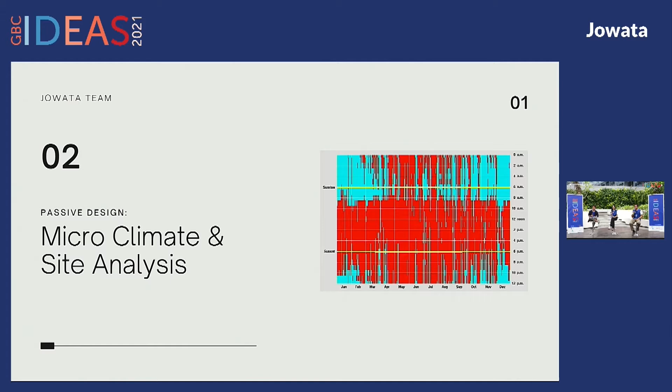Next slide, please. Next slide. Oh yeah. Next again. Next again. Sorry.

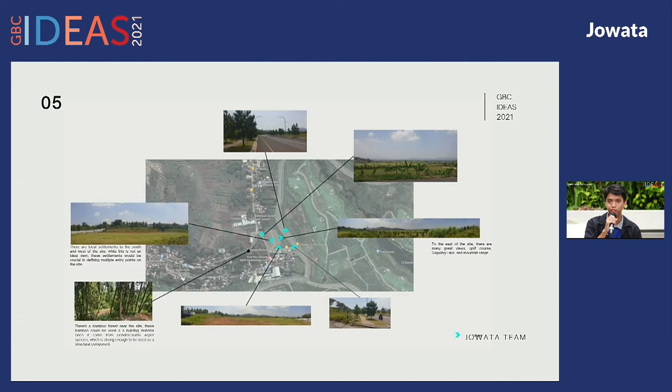Next, please. All right. Okay, so after analyzing the site, we chose to prioritize our anchor of the site towards the east and the west of the site itself. Because the east side has many great views like Lake Saguling, golf courses, and mountain ranges. And towards the west of the site, we chose to put some entrance points for the local settlements there. Next slide. Next.

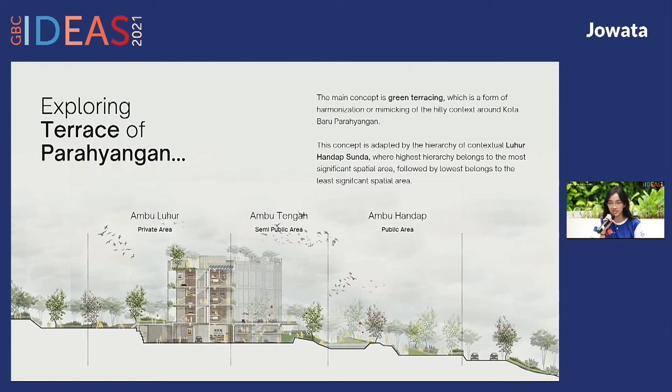Exploring the greenery of the integrated new city, Kota Baru Parahyangan, our site is surrounded by a potential range of mountains. Two words that immediately pop out of our mind are Hijau, which is green, and Perwata, which is mountain, in Sundanese. These words became the pioneer for us to create a concept of green terracing, a form of harmonization with the hilly context of Kota Baru Parahyangan. We also adapt luhur handap, which is a placement of usage area based on its hierarchy. Next.

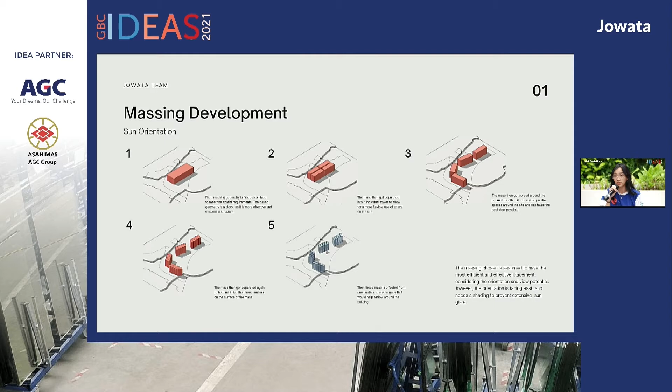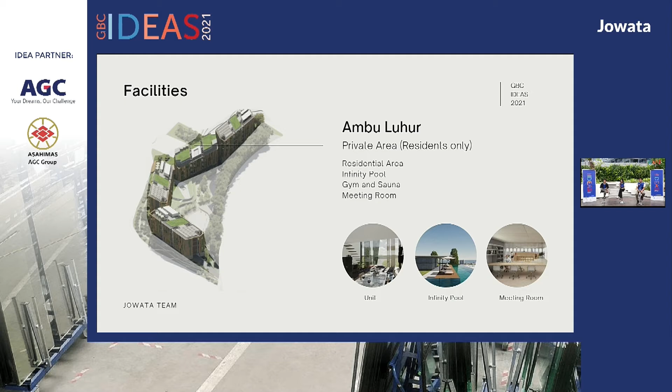Starting off with the block geometry adapted from spatial organization, we develop massing with wind flow and sun orientation consideration, reaching the most efficient final massing to tackle sun glare from the east direction, but capitalize on the potential view and allow wind flow penetration. Next. The first one is Ambu Luhur. It is dedicated for the private area. Next. The semi-public is called Ambu Tengah. Next. And the public one is Ambu Handap, dedicated for leisure and hub center. Next.

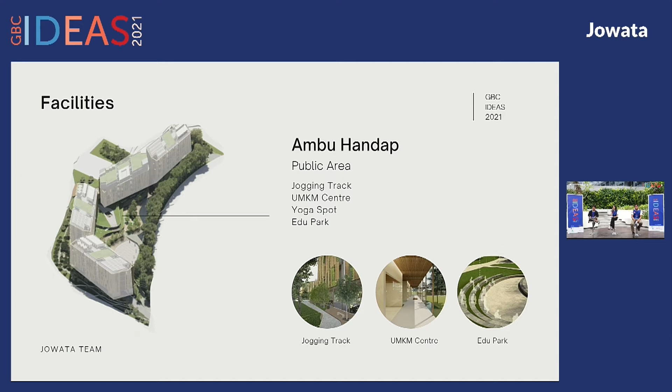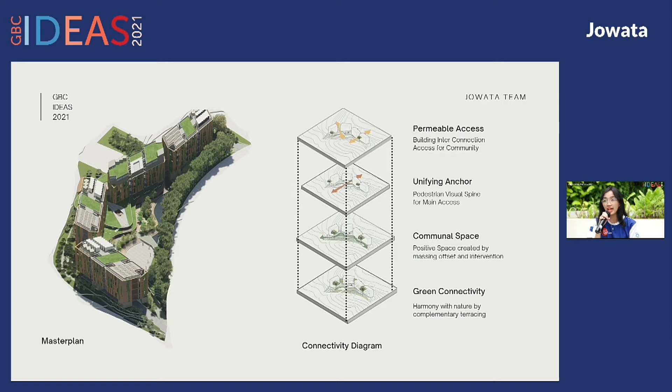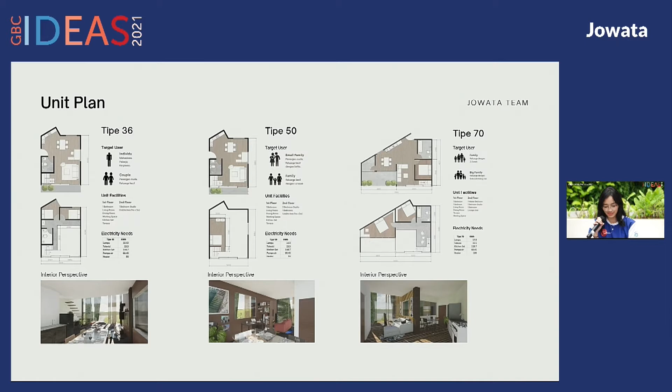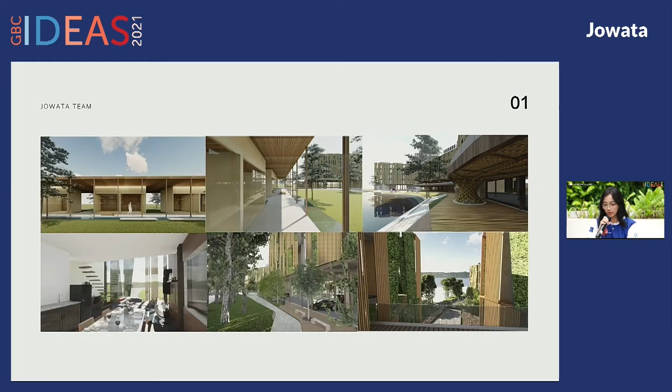We also have visualization of the master plan and connectivity diagram, in which we have permeable access, unifying anchor, communal space, and also green connectivity. Next. We also have 3 different unit types that aim for the diverse targeted users and various facilities. Next. The 3 main issues that we develop inside are social, ecology, and economy, in which we hope that Jowata can build a smart, sustainable green ecosystem that empowers the local community to drive the economy of Kota Baru Parahyangan. Next. Next. So here are some visualizations of Jowata. Next.

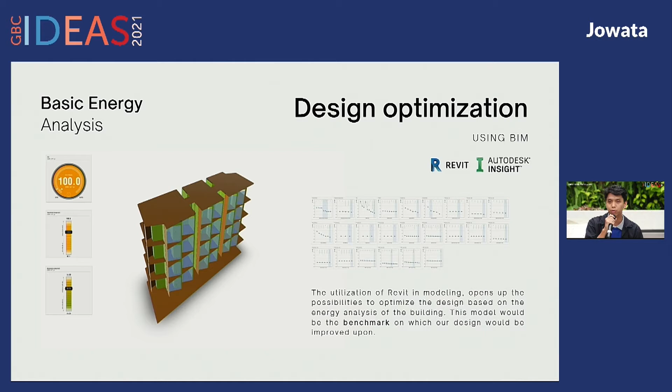So now we're moving on to the passive design strategy. Next. So before we dive deeper into the optimization, first we try to model our base building in Revit, and then also analyze it using Autodesk Insight, and then use it as a benchmark on which our design would be improved upon. Next. Okay, so here is the list of suggested strategies that could be applied on our design to help improve the EUI. Next.

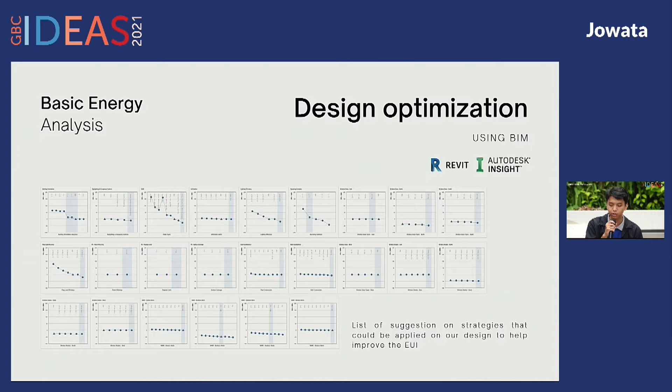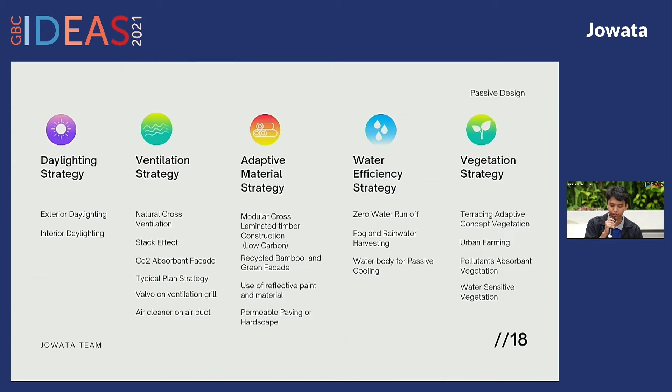And then these are the five strategies that we chose to use to tackle this issue. First is daylighting strategy, and next is ventilation strategy. The third one is adaptive material strategy, the fourth one is water efficiency strategy, and the fifth one is vegetation strategy. Next. Next. So for the daylighting strategy of the exterior of Jowata, we start off with the goal of obtaining the least solar heat radiation with a modification of orientation, geometry, plan layout, and also shading device facade. Next.

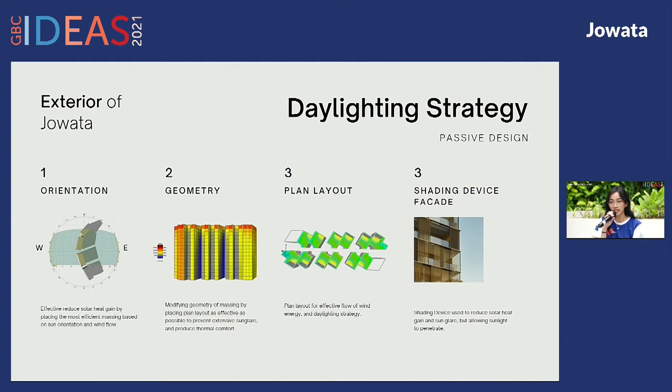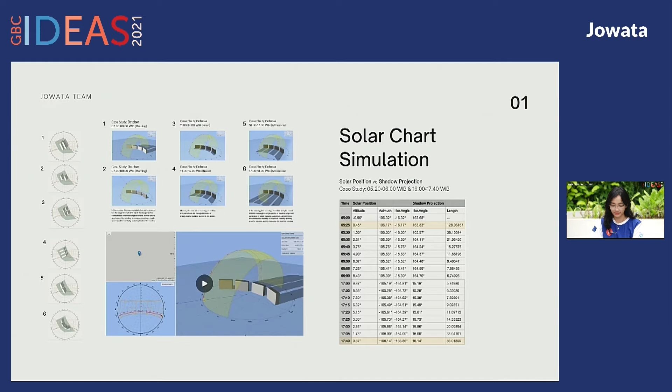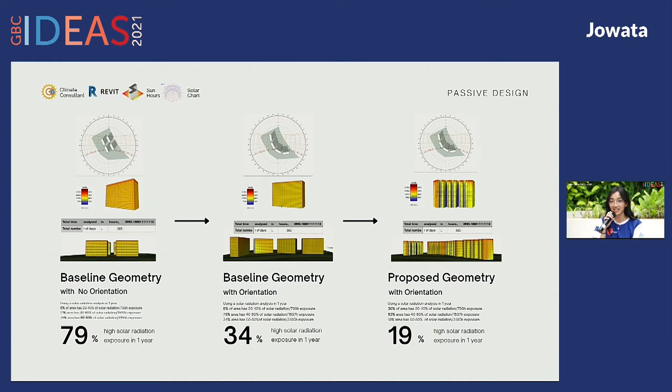So we try to run a solar chart simulation for the 6 massing studies that we currently analyze. Next. So the first one is baseline geometry with no orientation, and then baseline geometry, and then the last one is proposed geometry with orientation. From this simulation, we have succeeded to reduce 60% of solar radiation exposure to this building. Next.

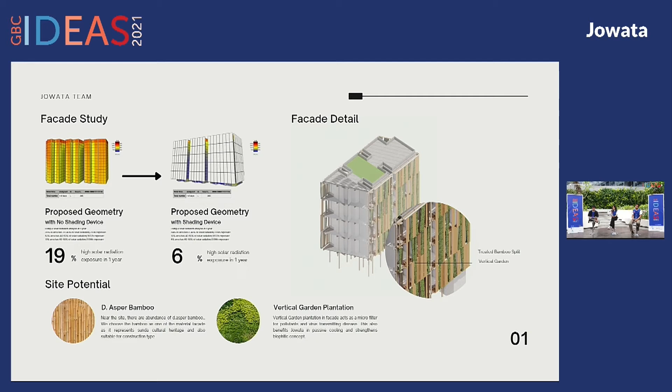For this shading device, we propose a combination of double skin Dendrocalamus asper bamboo and various vegetation facade which is abundant near Kota Baru Parahyangan. After simulation, we succeed to reduce the solar heat gain by 13% by this proposed double skin facade. Next. So here are some of the visualizations of the facade itself. Next.

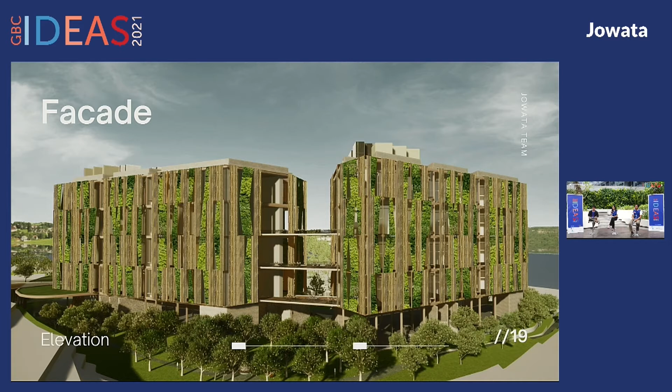Okay, so for the interior daylighting strategy, we use some different components on our design, which are skylight, AGC high performance window, double skin facade, light shelf, reflective paint and material, green roofs, light duct, and triple pane insulated glazing window. Next.

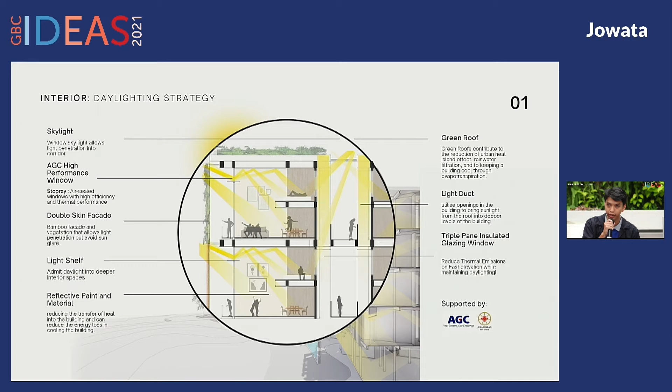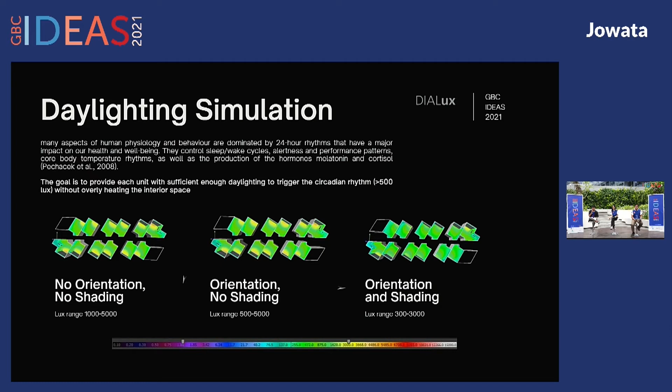And after that, we do a simulation using Dialux Evo. And the goal here is to provide each unit with sufficient daylighting to trigger the circadian rhythm, which is triggered at more than 500 lux without overly heating the interior space. And then these are the 3 variants that we use to simulate. And we chose the last variant, which is the optimized orientation and shading one. Next.

So here we could see that after choosing the third one, we still get more than 300 lux on the furthest side from the window area. And this is already enough for day-to-day activity. And then moving to the balcony, we could achieve more than 3,000 lux, which is enough to trigger the circadian rhythm. Next.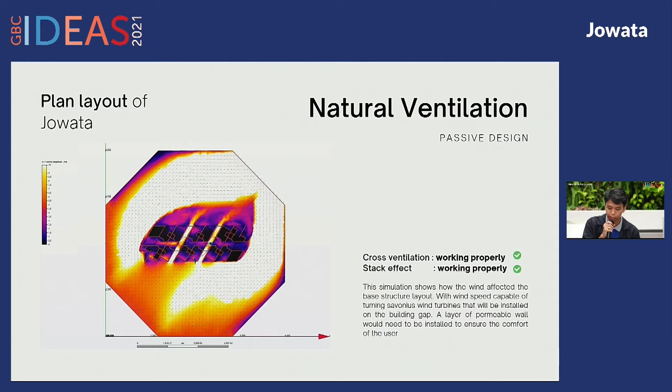Moving into the adaptive material. Next. So here we chose to use locally sourced materials and also high performance materials to help our design. As we can see here, there are insulated roof slab, teak wood CLT as the main structure, treated bamboo split as the facade, insulated GRC wall, woven bamboo as the insulation on the podium, Padalarang stonework cladding, and also treated full culm bamboo, which came from the species Dendrocalamus asper. Next.

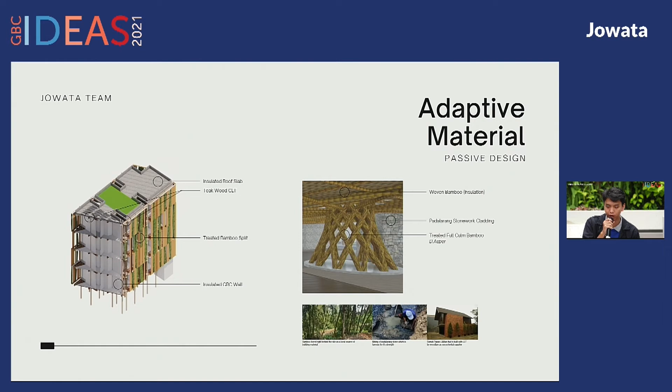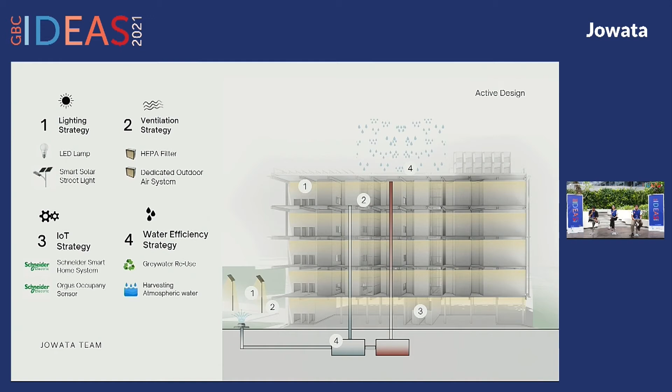And to the active design strategy. Next. We chose to implement 4 different strategies: lighting, ventilation, IoT, and water efficiency. Next. Okay, so moving on to the healthy aspect. Next.

For the protect health aspect, to reach the goal, we implement two strategies. The first one is passive, the second one is active. Passive happens through the optimization of natural ventilation, pollutants absorbent micropores facade, vegetation strategy, and water retention pool. For active, we implement HEPA filter inside the room, dedicated outdoor air system, indoor dehumidifier, and also gray water recycle.

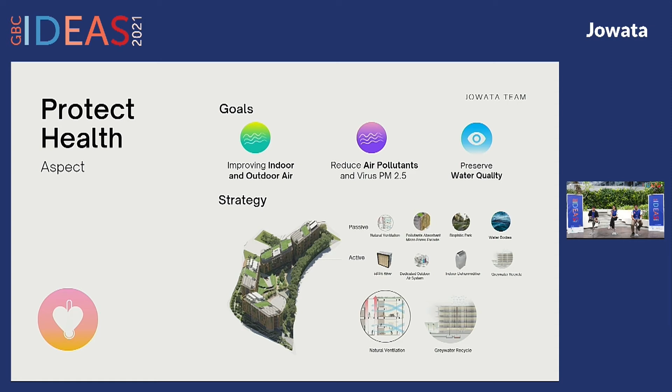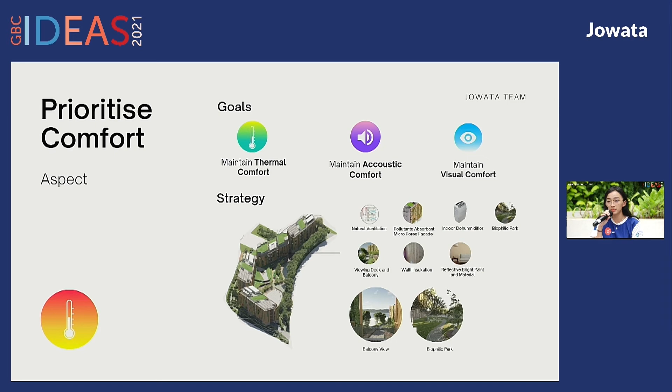Next. To reach the goal of prioritized comfort, we try to create a biophilic park. This will maximize the balcony view and also optimize natural ventilation, and create insulation on walls to avoid noises. Next.

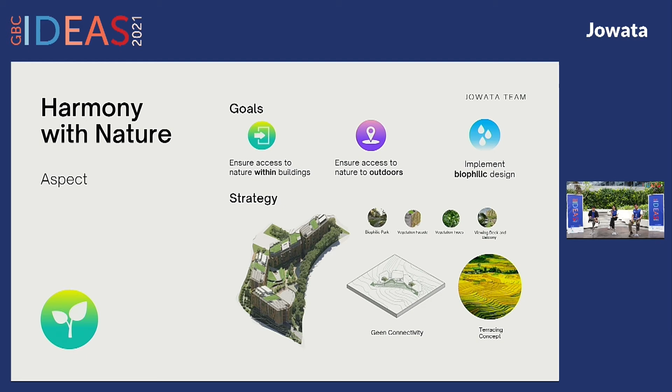To reach the goal of harmony with nature, we try to map the green connectivity on our site by creating vegetation clusters as recreation for outdoor and also a vegetation facade for the indoor area to ensure access to nature from inside. Next.

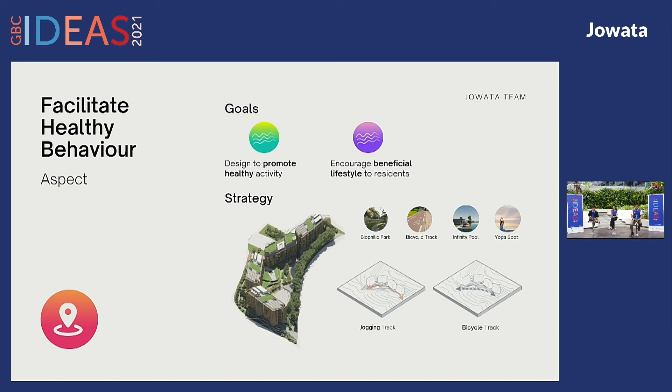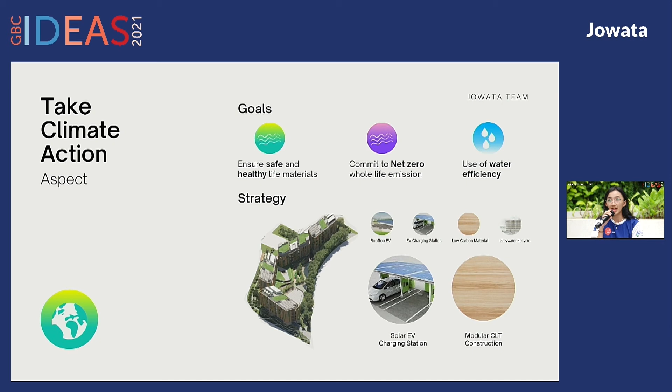Last but not least, we also support the take climate action aspect by providing the solar EV charging station and also use low carbon material in the construction of Jowata. Next. And then for the application of vegetation landscaping, next. So here we could see the different vegetation types which are zoned depending on their uses on our site. Next.

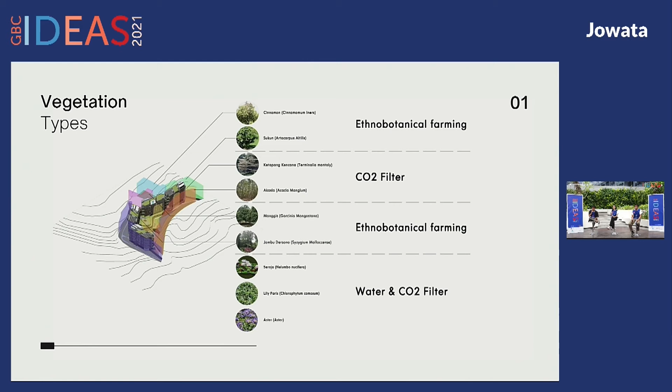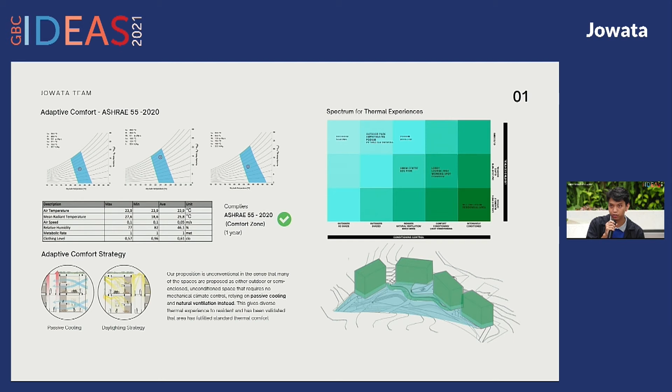And then moving on to the thermal comfort, next. So after running a simulation using the PMV method, we found out that our design complies with the ASHRAE 55-2020 standard by just using passive cooling and natural ventilation without using any HVAC. Next. So, ladies and gentlemen, here's the OTTV calculation from Jowata. It's really good because it's below 45 watts per meter square.

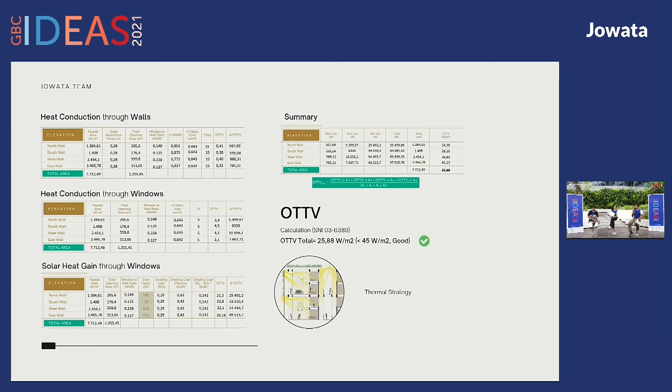Next, please. And after that, this is the calculation or comparison between our benchmark and Jowata itself. It means that we have a better EUI, 46% less energy intensive, and Jowata already has a chance to save almost 500 million rupiah every year. And we use Homer and also Revit and also Autodesk Insight. Next, please.

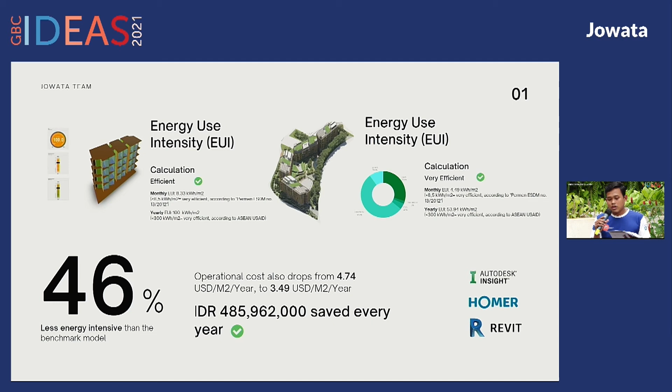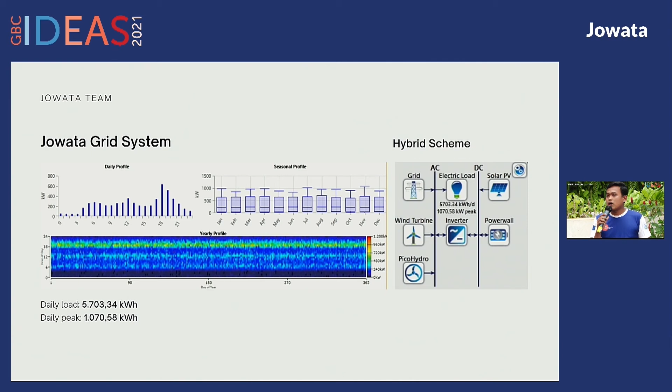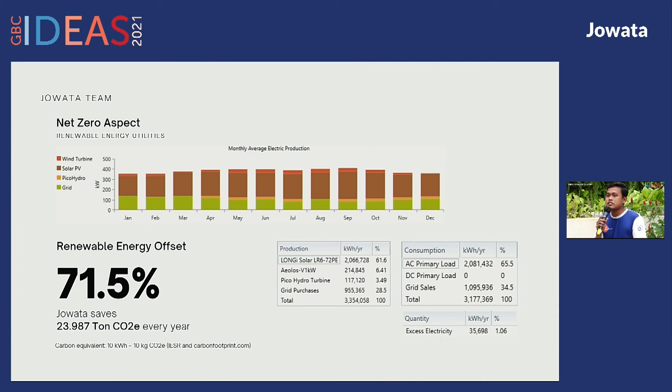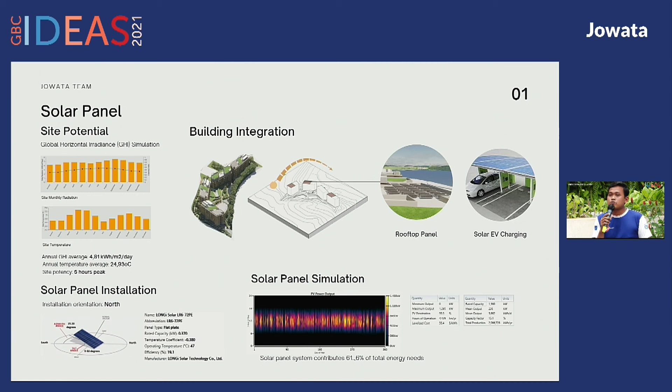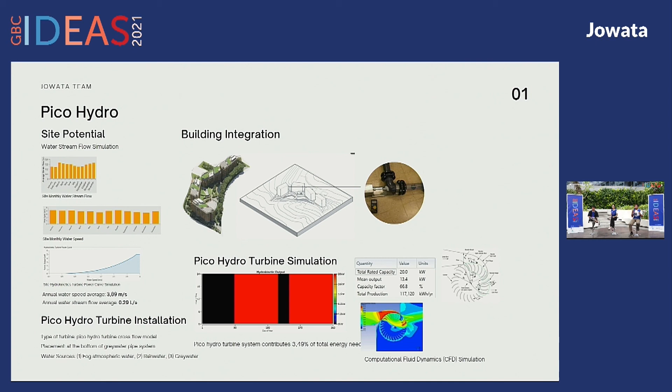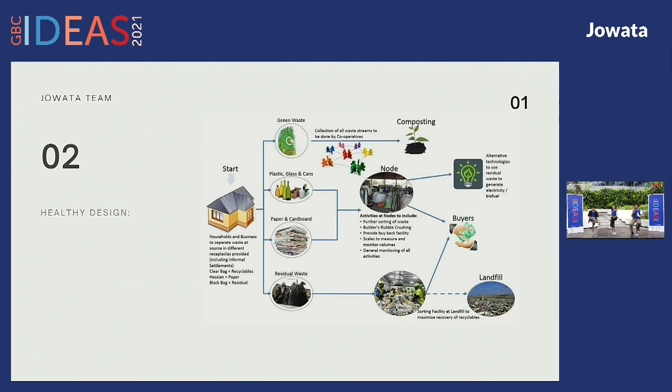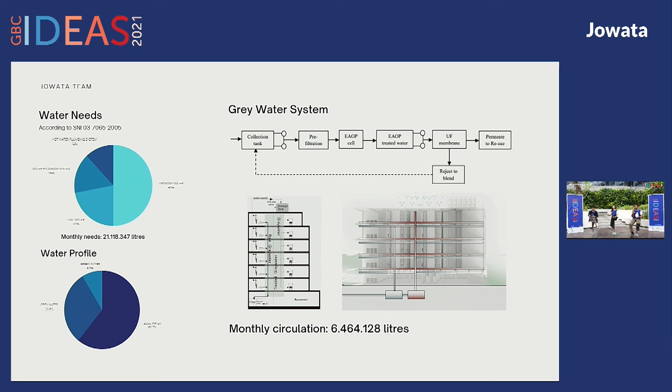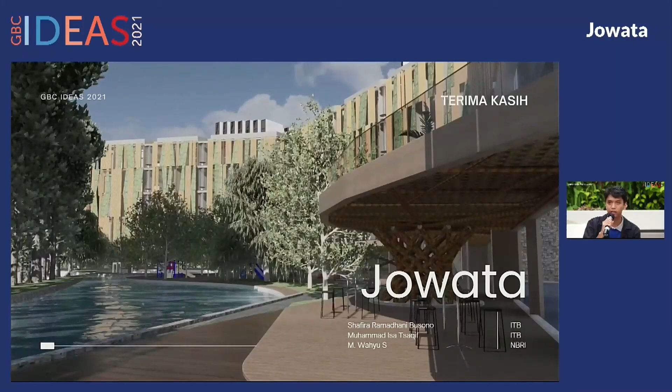So this is a video overviewing our apartment. This is the public space in front of the tower. And then this is the podium itself, which heavily uses bamboo as its structural material. This is the view from the podium. This is the plaza that is used for social interaction. This is the access towards the local settlement.

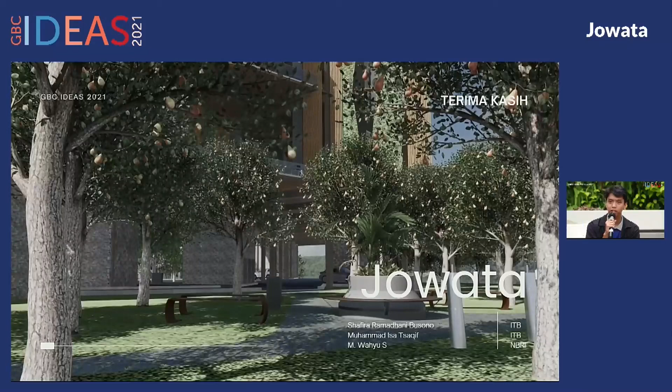This is a view from a unit of our apartment. And this is the jogging track, if I'm not mistaken. We plant many different species of ethnobotanical trees here. Okay, that's all from us.